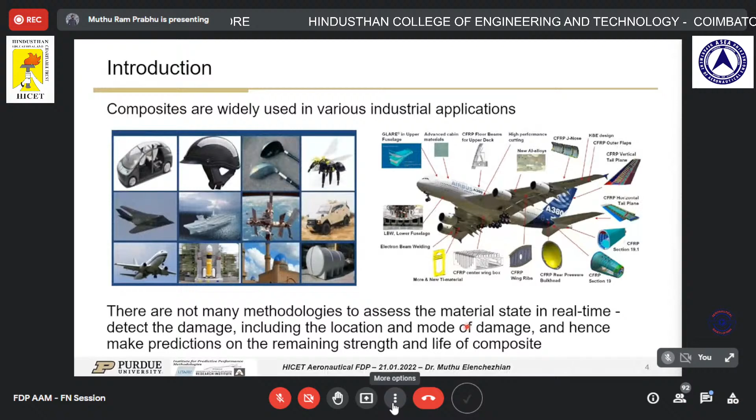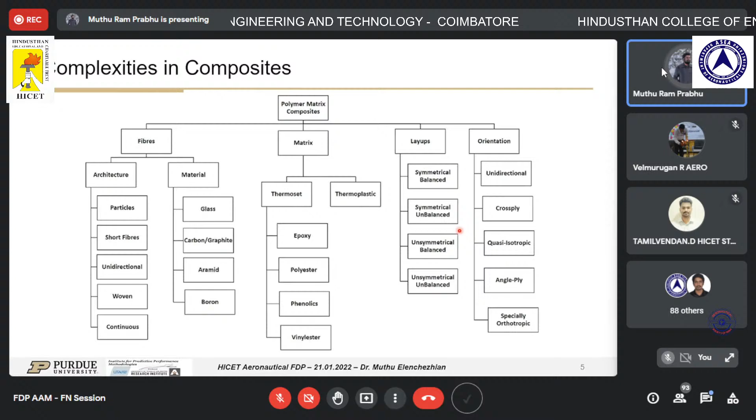So as we all know, composite materials have fibers and matrix, and can be made up of different layers like symmetrical or unsymmetrical laminates, and can have different orientations of fiber materials or prepregs or preforms. Changing each of these individual properties will affect the overall property of the composite material and change its entire behavior as well.

So for one such behavior, this is a typical damage mode which actually develops in composite materials. So the plot over here shows the percentage of life, and over here it shows how much damage the material has. So over the percentage of life of the structure, that is under fatigue loading conditions. By fatigue, I'm referring to cyclic loading conditions.

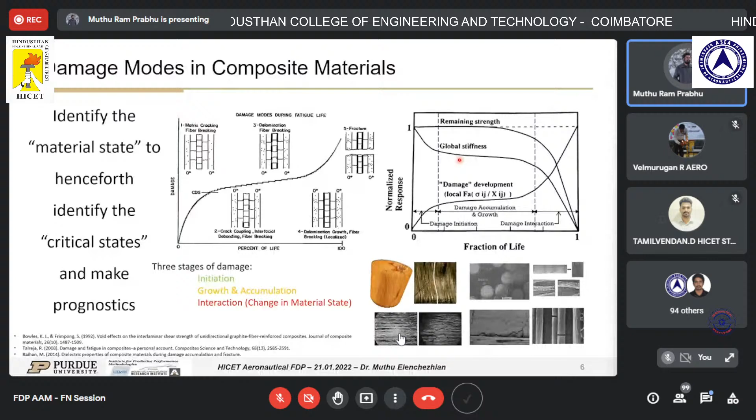First, in the initial stage, there's matrix cracking. So between the fiber and matrix, matrix cracking occurs first, and after that, over the duration of the life, the damage develops a lot, and the other 2 stages such as crack coupling and delamination will occur. And further, as it develops, the final fracture will occur at the final stage. And apart from only considering damage, we also consider stiffness, because the remaining strength as well as stiffness remain at high levels until it reaches the final stages.

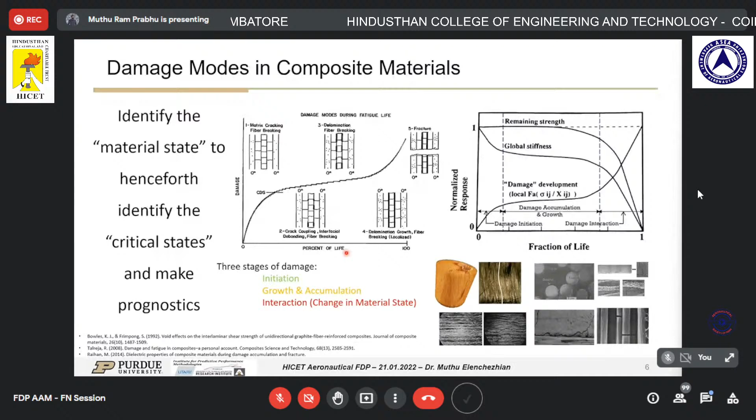So based on these 2 plots, we can actually categorize damage into 3 stages: initiation, growth and accumulation, which is the second stage, which is over here as 2, 3, 4 stages, and the final interaction stage where the fracture occurs or the complete failure occurs. So while identifying damage and testing, we need to identify all the 3 stages, and the methodologies need to be developed completely to identify all the 3 stages.

So I'll go to some review of literature. So overall, in the life cycle of composites, the first process starts with design, where we start with either classical lamination theory or material design. And after that, for manufacturing, it can be hand layup technique or vacuum resin infusion techniques, autoclave processes, out of autoclave processes. And right now the advancements are in automated fiber placement processes.

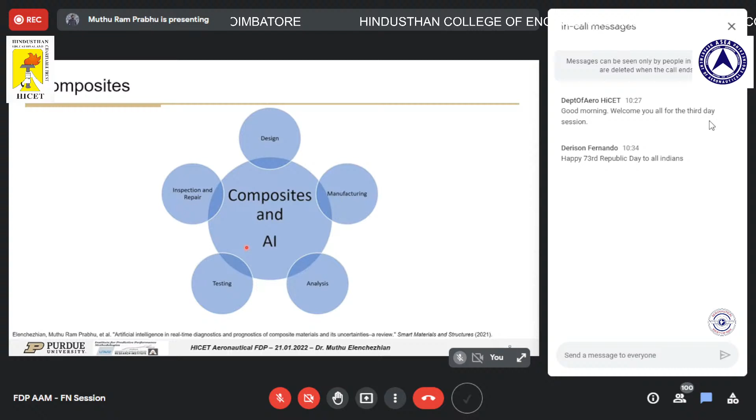And in analysis, it goes to CAE analysis and FEM analysis, where you do all the structural analysis in software. In the testing part, it's with sensor monitoring and non-destructive testing, where you do not damage the entire structure and do testing of the material. And in some cases, for the preliminary testing, you basically do mechanical testing or fatigue testing of the material, and based on testing you also do inspection and repair. So you analyze what kind of failure is in the material and further develop based upon it.

So in all these parts, artificial intelligence is right now being developed and involved to create the entire life cycle in a better way. So that is how it's focused. I also noticed there's another talk on design of composites in AI this afternoon, and so this particular talk will focus mainly on testing, analysis, and inspection and repair. So testing, inspection, and repair, mainly on structural health monitoring and how to use the sensor data to further predict the life of the composite material.

So moving forward, I will just go through the basic diagnostics and prognostics methods, like what are the sensor systems and how are they available. The most commonly used sensors which are embedded into aircraft structures are like this, and most commonly used are acousto-ultrasonics testing and fiber optic sensor systems. These two are most commonly used by most of the manufacturers. Acoustic emission is also being used, and each of these sensor types has different advantages and disadvantages.

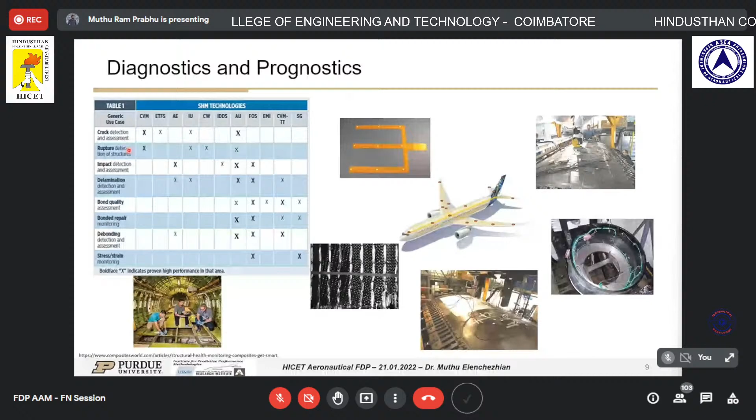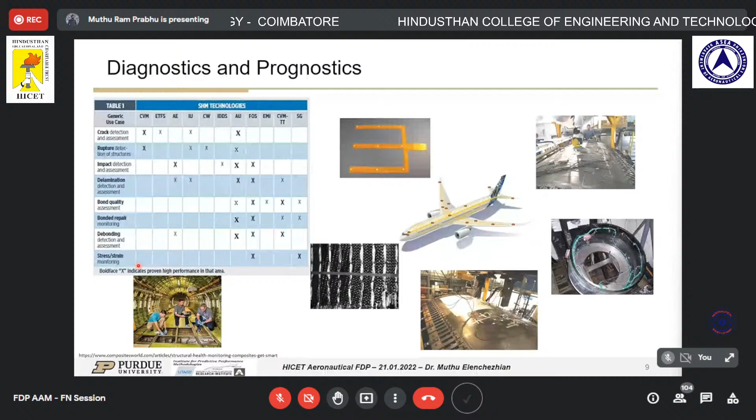That is, not one sensor can measure everything, and for each of these techniques you need manual, human intervention, where someone who has the complete knowledge of sensors and how to analyze the data has to be there to see what kind of results the sensor gives, and hence suggest what methods can be improved. And why do we need artificial intelligence to take part in this composites integration for diagnostics and prognostics?

But when there's a large amount of structure and assumptions which cannot be derived completely, you will have a large amount of data, and that's where data-based learning, machine learning, and artificial intelligence comes into play.

So the main method for my research work was, after we identify the damage and do some assessment based on non-destructive testing and structural health monitoring, we develop methods which can predict the residual strength and life of the material. Further, we use artificial intelligence techniques to take decision actions, like control actions, on how we can control the load, perform maintenance and repair operations in aircraft structures, and properly send the structure for maintenance.

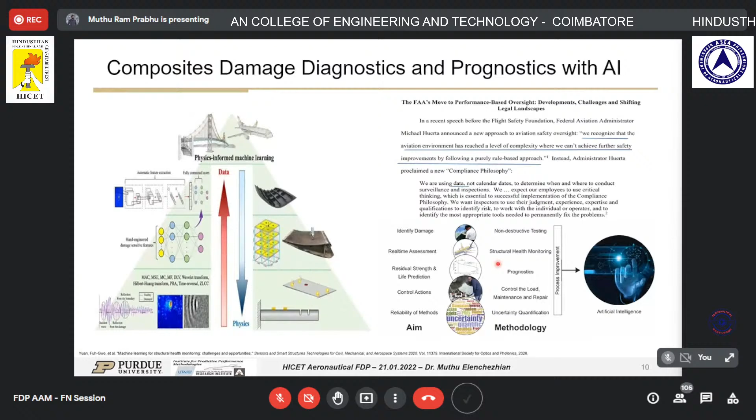If you see on the research side, academia side, or publication side, earlier from 1990s to 2015 or 2010, the number of articles published which combine composites, structural health monitoring, sensors, and artificial intelligence were very few. Only during the past 5 years has the number of publications, the amount of research work, increased a lot. Even funding has increased more for AI developments, due to the improvement in computer technology and the capabilities we have right now.

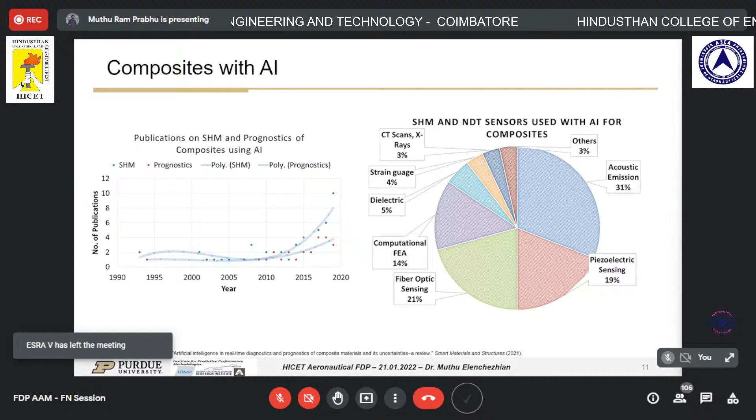So some previous work, how other researchers have used composite materials with artificial intelligence, includes...

Can you hear me properly? Yes, sir.

So with composites and AI, other researchers have done things like manufacturing and testing services. During mechanical testing, they collect data using acoustic emission sensors, and from the data they use vector of descriptors. For each sample they collect the data and analyze it. After that, sometimes we have a complete labeled dataset, meaning from the data collected by mechanical testing, we know what is happening behind it through the ground truth data. But in some cases, you do not have any ground truth data.

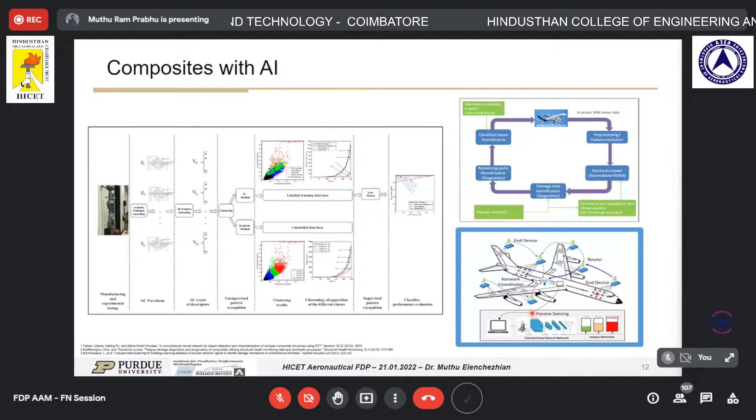This is another concept where researchers have proposed using completely integrated sensor systems, which collect data through additional wireless sensors that transmit to a control device, which communicates with the machine learning models. Based on the type of defect or impact, it will be able to say whether the condition is safe or damaged, or what service needs to be taken.

So for prognostics, even though more methods were developed on diagnostics, which is identifying what type of damage it is, there weren't many researchers who mainly worked on prognostics. That is, after identifying the type of damage, how to predict the entire remaining life of the material. This was an interesting topic which I began to work on.

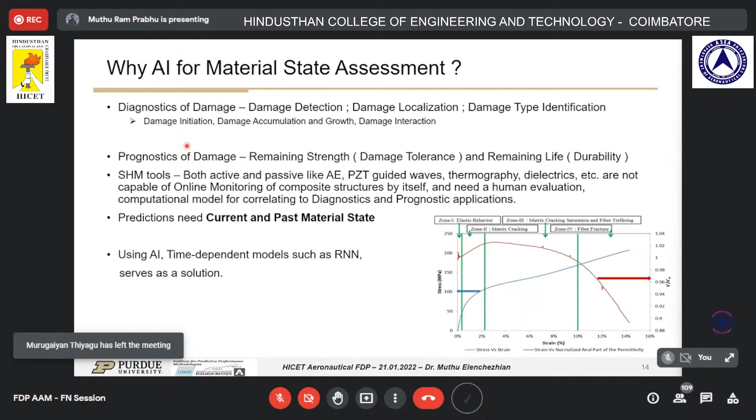So as a summary, why do we need artificial intelligence for material state assessment is, as I mentioned earlier, the damage types depend on damage initiation, damage accumulation, and damage interaction. However, all the SHM tools can collect data on the current state of the material, but always need some human evaluation or other computational model to actually predict the life or something.

So by using artificial intelligence with time-dependent models like recurrent neural networks, we would be able to use the current state of the material, what type of damage it currently has, and also observe the past behavior, how the material has been performing so far, if there's been any crack developed previously, and how that crack is currently influencing the current damage. This could be possible by using artificial intelligence methods completely.

So what is artificial intelligence? I'm not going to go deeply into the mathematical detail, but I'll try to provide an overall overview of the AI examples completely.

In traditional methods like classical lamination theory or any physics-based methods that we develop for FEM or anywhere, we have the theories and we have the input data that we need to provide into the model we are developing. Based on that, we develop the codes and model and we finally get the answers.

But in artificial intelligence, you actually have the answers, like the solution, and you have experimental data, and you do not know exactly what is happening between them. You do not know a complete relationship, and you want to establish one. So for that case, you use AI models to develop the relationship, and that relationship, once developed, just serves as theory.

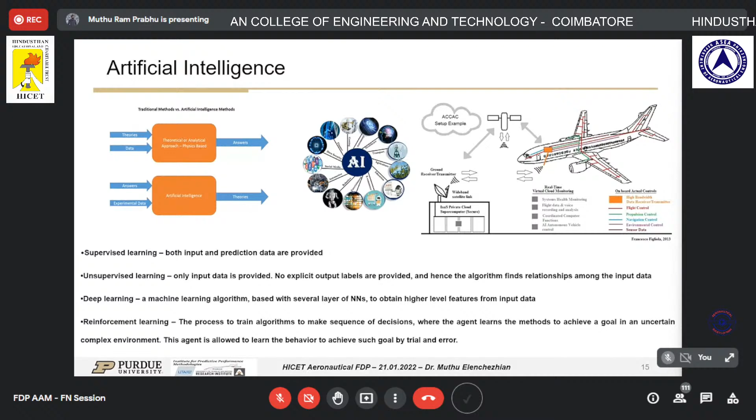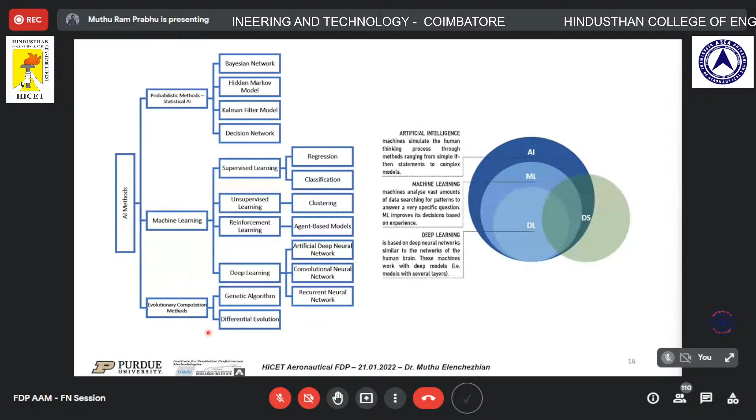Based on this, you can also develop different models, like statistical AI methods, normal machine learning, which I spoke about earlier, and also evolutionary computational methods like genetic algorithms and other things. My research and this presentation will mainly focus on machine learning, that is purely data-based algorithms completely.

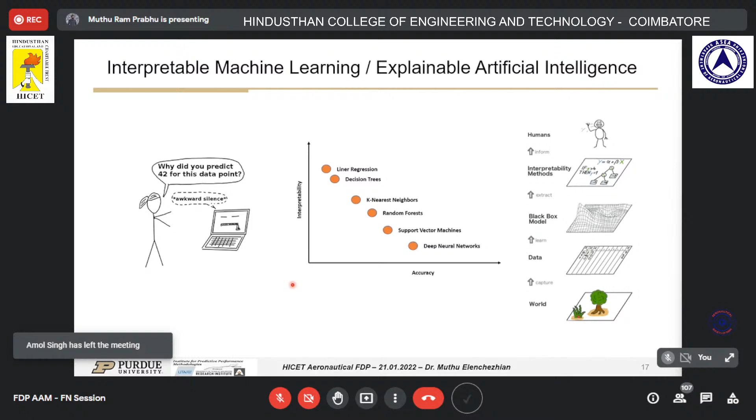Apart from the AI part, development has been done for the past 5 to 10 years. However, the current interest in the research field is about interpretable machine learning or explainable artificial intelligence.

Let's say you develop an AI model and it predicts a particular value, that this is going to be the life, or the strength of the material, or some other outcome for your own project or case. So why did your model predict that particular result? You need to be answerable on why that particular decision was made, or what kind of data made that decision.

That is one of the interests, and it's mainly important because most companies or industries right now develop AI models for space applications and critical domain applications, but for these you need certifications. Without certifications you cannot proceed further, and to achieve them you need to be 100% sure your model is completely accurate in predicting, or at least 99% sure, because it involves a lot of cost and lives as well.

This particular concept has recently been developing mainly for composite materials. I haven't seen more than 10 to 20 papers on this topic as of now, so this is an emerging research field as well.

In this presentation, the models I have used mostly are like linear regression, where you directly establish a relationship between input and output variable in a linear manner, and logistic regression. I have also used random forest, which is kind of like decision tree algorithms, where you can use it for either classification or regression.

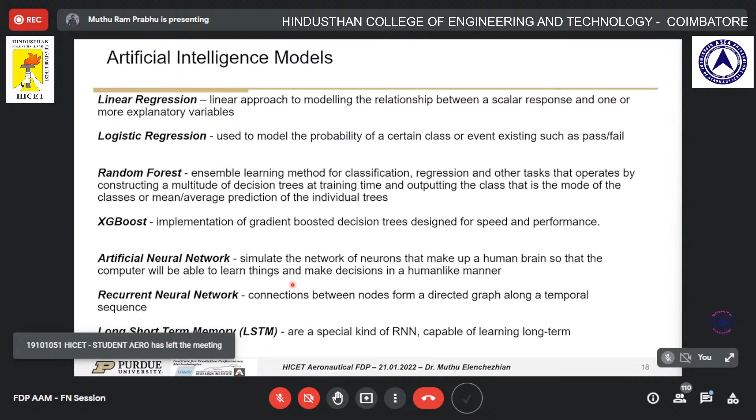For a neural network model, the simple example is input-to-output mapping. You have a number of inputs, and with these inputs, you need to map to a particular output. So you design a layer, or some in-between layers, and those layers assign some weights. The output is calculated based on how the weights are generated, which are randomly assigned in the beginning, and further developed to predict the output.

I'll explain this with a simple example, which many of you might have already seen if you've taken Professor Andrew Ng's machine learning course on Coursera. But for those who haven't, this basic example helps us understand the concept more clearly. This example is about the AND gate.

All of us have learned what an AND gate is and how it works. The AND gate has two inputs, x1 and x2, and the output y does the AND operation for x1 and x2. Now we are trying to generate this as a neural network model, or like a simple logistic regression model.

So over here we have the same x1 and x2, and we have a bias term which is 1. Now we need to assign some weights to it, and the weights are 20, 20, and minus 30. Once the weights are assigned, we need to calculate the output, and it is calculated by a function: g of minus 30, into the complete term over here.

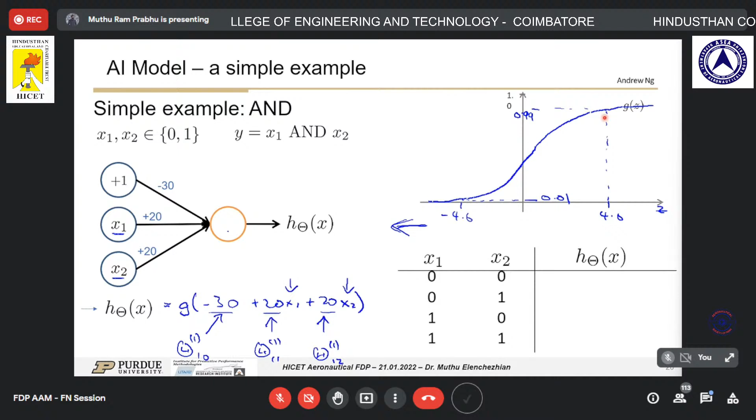So this is the function which has been calculated, and based on this you have an activation function. Over here we use a sigmoid activation function, and there are many other activation functions that can be used. So if g of this particular value is greater than 4.6, it corresponds to 1, and if it's lesser than negative 4.6, it corresponds to 0. Based on what this value develops, we would be able to produce the output for the AND gate.

So this is a very simple basic example of how a one-layer neural network model can be developed. Most artificial intelligence is developed based on these principles but becomes much more complex depending on how many layers you use, what kind of optimization algorithms we develop and use, and how we actually generate the entire models. It mainly depends on what data you have and how your data development is.

So the basic steps for these artificial intelligence models are: first we pre-process the data, that is data cleaning and normalization. Sometimes you have uneven data, like the total length might be non-uniform, so in those cases we do data padding, that is we make the data uniform length.

After that, the total data set will be divided into two different sets: training set and testing set. In most cases, 80% of the data is used for training and the remaining 20% is used for testing.

And with the training set, you can actually do a cross validation test, that is, this 80% of the data goes into cross validation, where you can do a 5-fold or a 10-fold cross validation. During each development process, the number of training and cross validation tests changes, and based on this, multiple developments are done so you can do hyperparameter tuning. So this is how a basic AI model is developed.

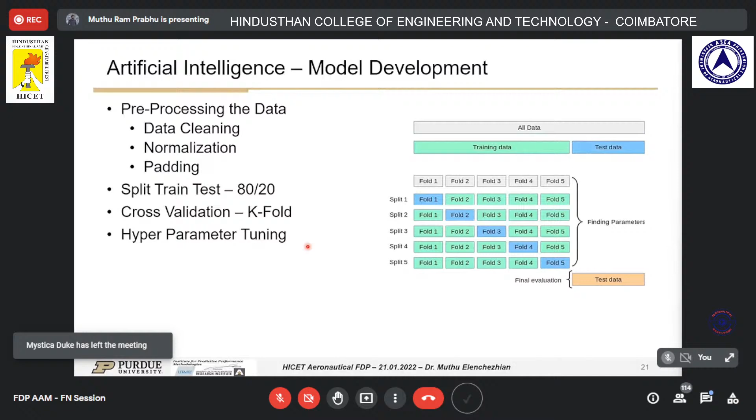Now moving forward, I'll talk about the main focus of my earlier work. I want to implement a complete real-time prognostic system where you place sensors in the aircraft structures and develop a cloud-based monitoring system where, by the aircraft's tail number, you can observe what kind of sensor data the aircraft collects.

And based on the cloud, you can see its material properties, manufacturing data, how it was manufactured, how many times it was serviced, and what the previous material condition was. By the real-time sensor, you collect what the current material state is, and based on that, the AI model will predict the structural airworthiness of the aircraft.

That is, whether the aircraft is very safe to fly, or when it needs to go to maintenance, or what needs to be done next for the aircraft—after how many days, months, or years it needs to go for maintenance—so that it can be scheduled accurately and proper maintenance can be taken care of.

So next I will go with the sensor technologies which I worked with. I'll be introducing a concept called broadband dielectric spectroscopy. In most places, this is called electrical impedance spectroscopy. The way electrical impedance spectroscopy works is by the interaction of electromagnetic waves with matter, which reflects the underlying molecular mechanisms.

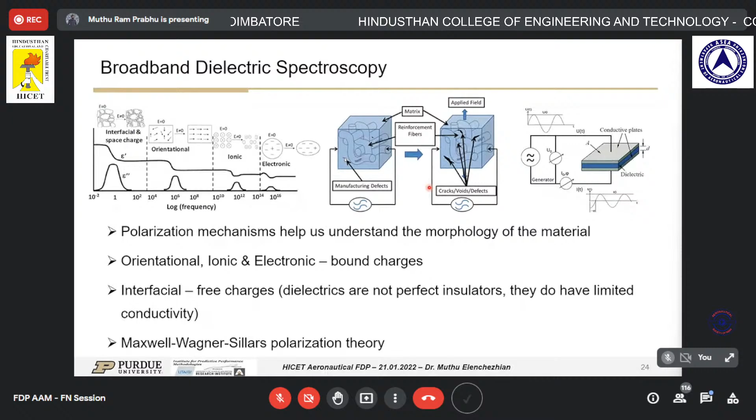So based on how the property changes between the initial state and later state, the difference between them is obtained. The relationship between the final state of the structure versus the initial state of the structure is what gets correlated to other patterns. This technique is not very popular, but it's been developing. My research group at UT Arlington, where I worked earlier, has been developing this a lot, and based on this, we did a lot of work.

So the blue curve over here represents a normal stress-strain curve, obtained by the MTS mechanical testing machine. And the red curve represents the normalized permittivity values, that is, the permittivity value with reference to the initial value. Comparing these two curves, we could correlate them into four different stages based on how the rate of the red curve develops, and this is correlated to zone 1, zone 2, and what kind of damage mechanisms happen.

And this test was done for about 50 samples. On most of the 50 samples, what was observed was that if the mechanical property, that is the strength of the material, was higher, then the dielectric property observed was lower. This is compared to the average values of the mechanical properties and dielectric properties.

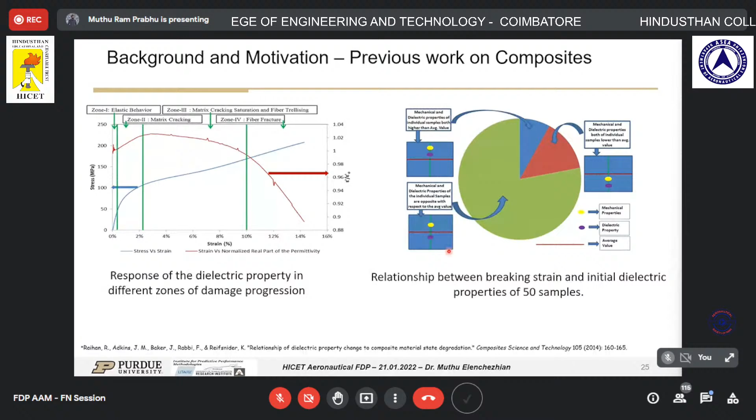Further, we also do adhesive bonding, where you bond composite structures or even metallic structures. Most aircraft structures, like helicopter rotor blades, do not use fasteners or other joints, and mostly use adhesive bonding because of the stress concentration factor. However, the weak point of adhesive bonding is that it can have a kissing bond or weak bond, and they need proper methods to analyze them.

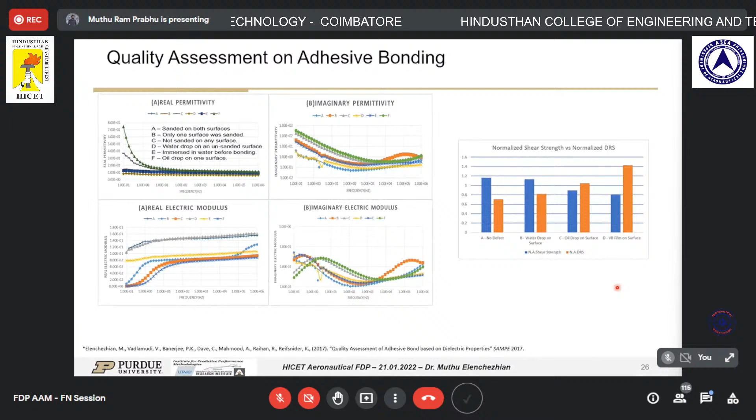So we use this broadband dielectric spectroscopy to make different types of defective samples and compare them. Based on the comparison, if the shear strength of the adhesive bond increases, what was observed was that the dielectric property was decreasing. So this was one of the methodologies that I used for most of my research work and for my PhD dissertation as well. And the other sensor technology that I used commonly was the fiber optic sensing system.

The fiber optic sensing system is similar to our optical fiber internet cables, and most fiber optic sensing systems work by the principle called fiber Bragg gratings. Basically, in the initial stage, you have a particular Bragg grating, and when the fiber is elongated, that is when any thermal or mechanical load is applied, the fiber stretches and the Bragg grating moves. Based on how much it moves, you can calculate the temperature difference or strain difference the material is undergoing.

And this has been a very popular application currently used in aircraft and space research, as well as for civil and industrial applications. Over here you can see a bridge which has been built in one of the rural villages here in the USA, in Tennessee. This bridge is completely made of composite material, and it also has fiber optics implemented into it as a monitoring system. It monitors how much load the bridge experiences during the entire time.

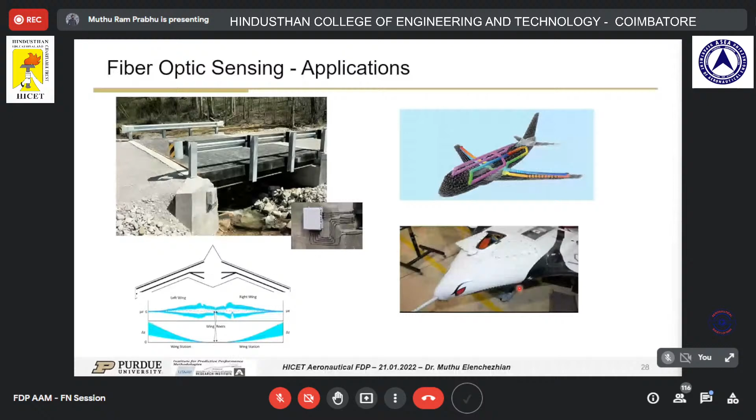Also, it can be used to track whenever a vehicle crosses the bridge. So based on whenever the vehicle crosses the bridge, that's a load which has been observed on the bridge. And in future, this can be implemented into complete aircraft structures by placing fiber optic sensors. As a demo concept, most UAVs right now have started using fiber optics to see what the strain deflection is during the actual flight, during takeoff and landings and such.

Another advantage of using fiber optic sensors is that the optical fiber sensors can be placed during manufacturing. That is, during layup, you can actually place the optical fibers into the entire composite structure itself. And the strength of the composite hasn't been found to vary a lot based on this. After this, during curing, you can also monitor based on temperature and flow how good the composite curing is. And in operation, you will be continuously monitoring the real-time health and strength.

So this is all the basic introduction, and I will move forward with my actual research work. This will show the actual examples which I performed based on the studies I have done.

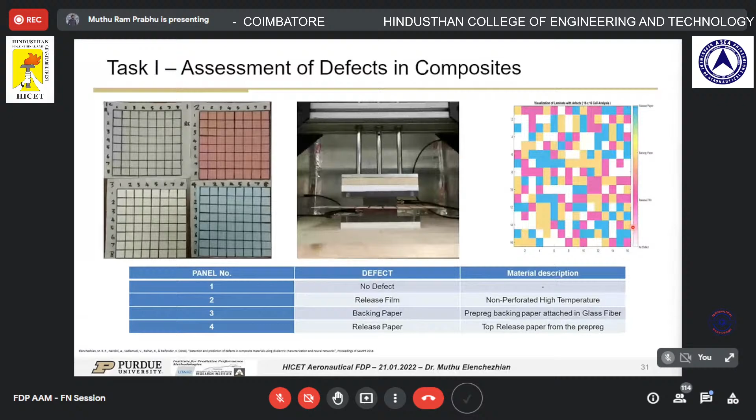So the first research task was performed to assess the defects in composite materials. I made 4 different composite panels and artificially induced defects in them, using a release film, backing paper, and release paper. Based on this, we did broadband dielectric spectroscopy measurements. If you imagine what the actual manufactured panels look like, they will look like these different images with different defects in them.

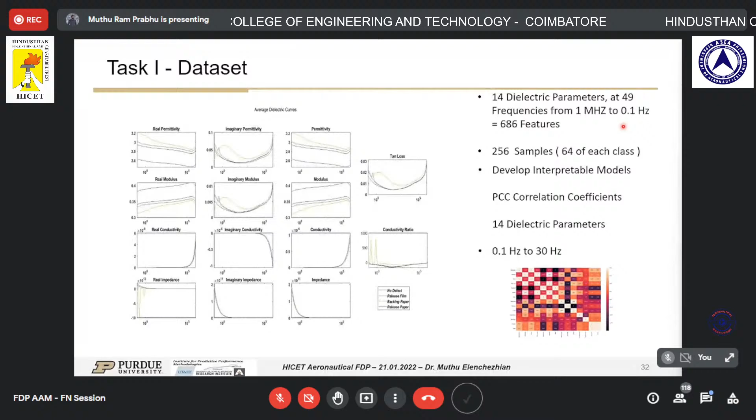Based on this, we collected a complete data set of a total of 256 samples. We had 4 different classes, so 64 data points for each class, and all of them have 14 dielectric properties. These 14 dielectric properties were collected at different frequencies from 0.1 hertz to 1 megahertz, that is, across the entire dielectric spectrum. After that, we did a Pearson correlation analysis to analyze the correlation between dielectric parameters, and it was reduced down. Only the limited data set was used for the complete analysis.

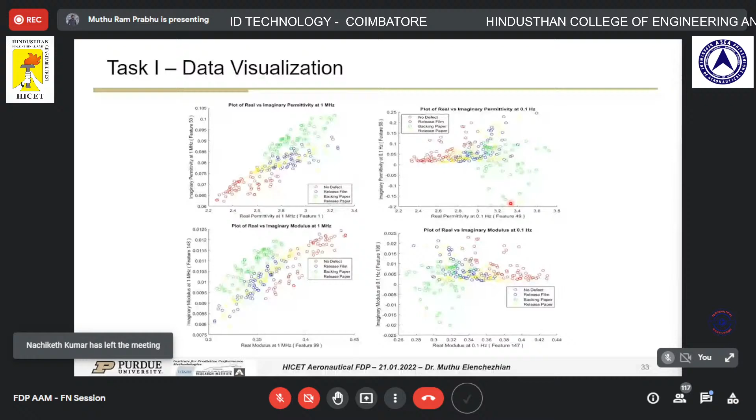The first thing we always do with data is visualize it to see if we can physically see any relationship. For the different features in the entire data set, we differentiated them into different classes. Over here you can identify a few of the defects, like which class each belongs to based on the data. Further, if you develop a machine learning or AI model, you'll be able to accurately define it, because visually you can just see 2 different features, but here you had almost 47 or 48 different features which I used in the final model.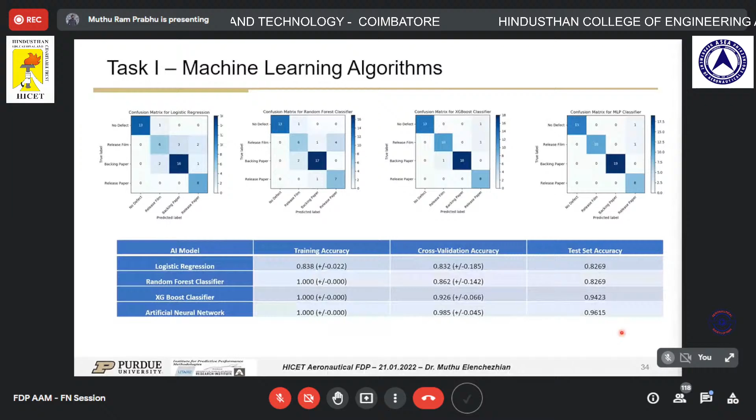We developed 4 different models, like a logistic regression model, because it's a classifier algorithm. After that, we used a random forest classifier and an artificial neural network model as well. These are the confusion matrices. A confusion matrix shows the true label versus the predicted label, that is, the ground truth data versus the predicted data from your artificial intelligence model. All 4 models had good tested accuracy, and the artificial neural network model had the highest accuracy.

For interpretable machine learning, researchers have also developed a concept called LIME, and based on this, you can obtain similar results. You'll be able to predict which particular feature contributes how much to each class of prediction.

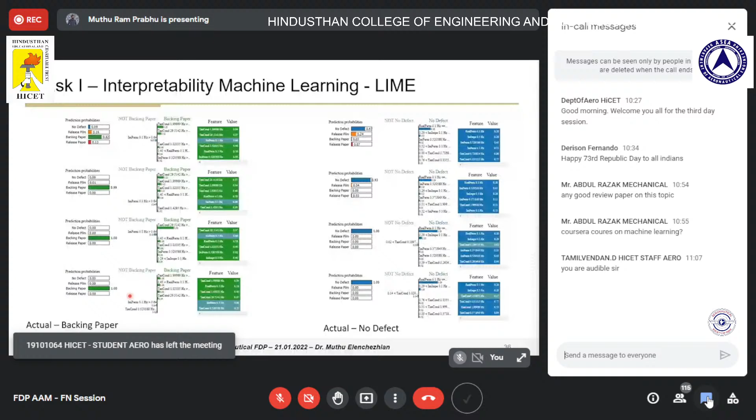So for all 4 models being developed, it was identified that the conductivity values over here at the low frequencies were contributing to the final prediction. So based upon different algorithms or different techniques that you use, your predictions will completely vary. So the main goal of developing the AI model is validating it. You need to be sure which algorithm gives you the most accurate and reasonable results.

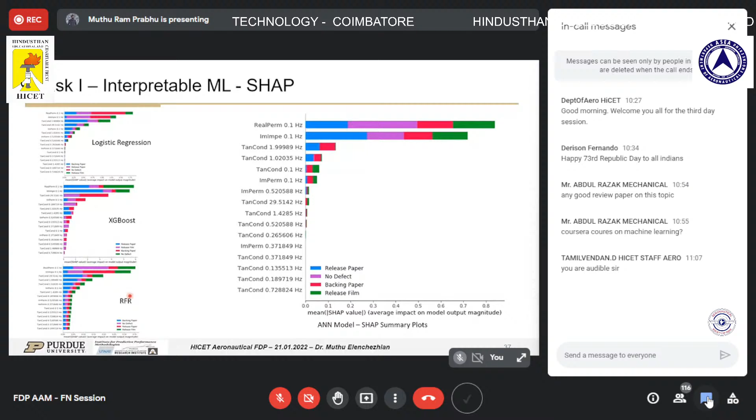And another technique for interpretable machine learning is SHAP. It does the same thing, but by another method. And in SHAP, you can actually do the global prediction, that is, identify which features contribute to the entire model's prediction as a SHAP summary, as well as you can do local prediction.

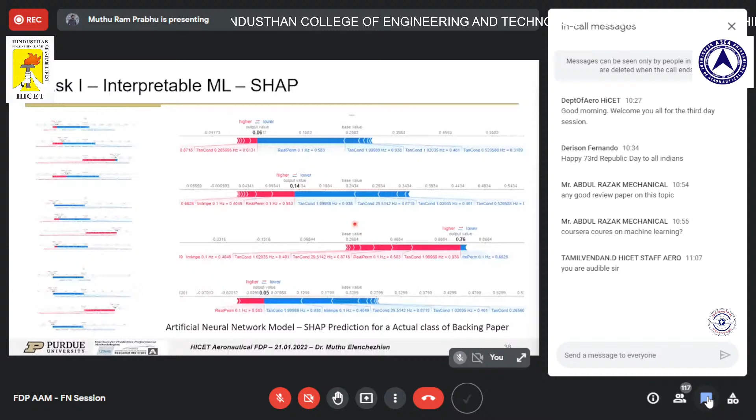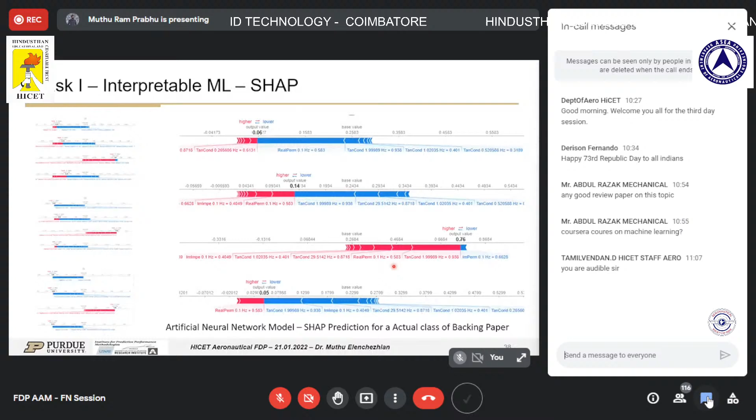So let's say the model predicted that your defect is going to be the third class over here, that is the backing paper class. Then you can say for this backing paper class, which has the highest value over here, as in all the other three models as well, which particular values contributed to it most. Here you can see it's the real permittivity at 0.1 hertz and the conductivity value at 2 hertz. And one thing you notice is different models give different results. So it's more important to validate it at a further stage.

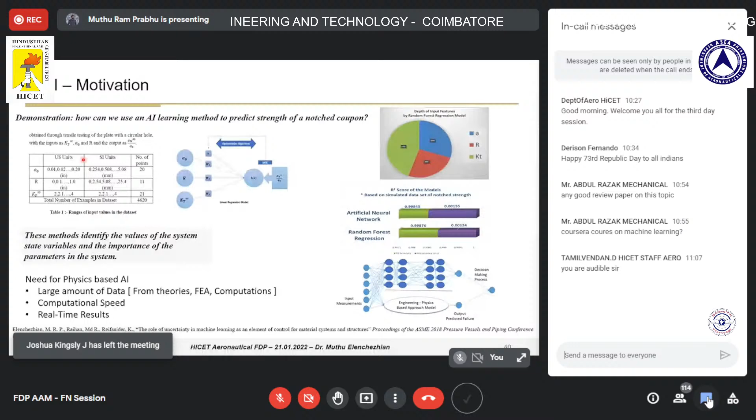The next task I'll be speaking about is how to identify the damage state. So how we started this work was, we first took a physics-based equation similar to the AND gate example. We took the relationship to obtain the notch strength of the composite material, sigma n divided by sigma naught. And the notch strength of the composite material is based on three input factors, which are KT, A naught, and R. So based on these three values, we have a physical relationship which has been established, and we generated an artificial data set with random input values for all three parameters, obtained from statistics and the literature.

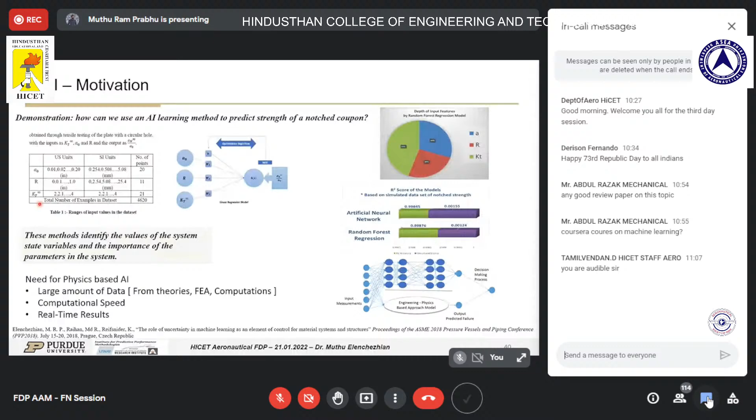And since this data set is developed from a physics-based equation, the R-square scores of the models are very high. It's more than 99.8% in both cases. And with the random forest regression, you can also identify what features contributed to the output prediction of the model.

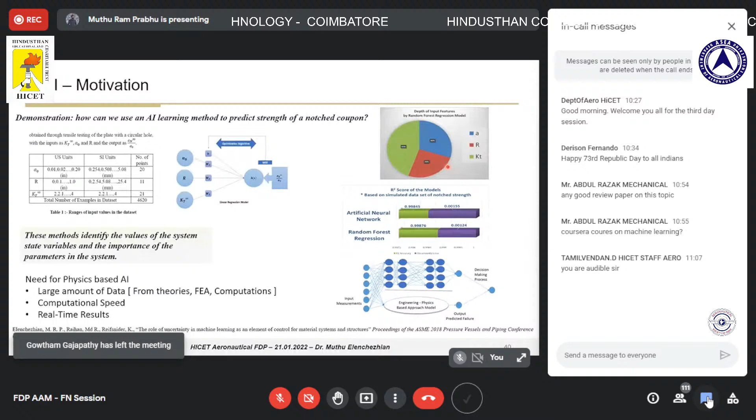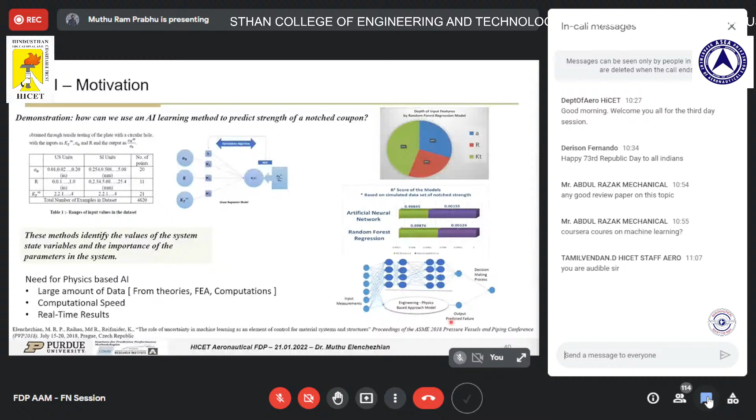And the main goal of this work is that apart from just using the experimental data that we are developing to build the output model, if we use some known physics in between, when there's a large amount of data involved, you will be able to develop a complete hybrid model. And this hybrid model will be able to produce results more accurately and lead to the final decision-making process.

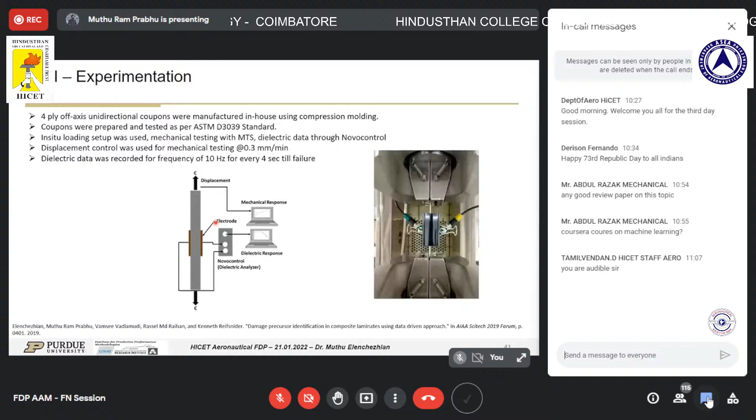And on the experimental side, what I performed was quasi-static testing of 4-ply off-axis composites. These were tested as per the ASTM standard in MTS. And during this, we collected the dielectric data during the quasi-static testing. Based on that, this is the fractured sample. And this is the stress-strain curve as we showed earlier, and this is the dielectric relationship curve.

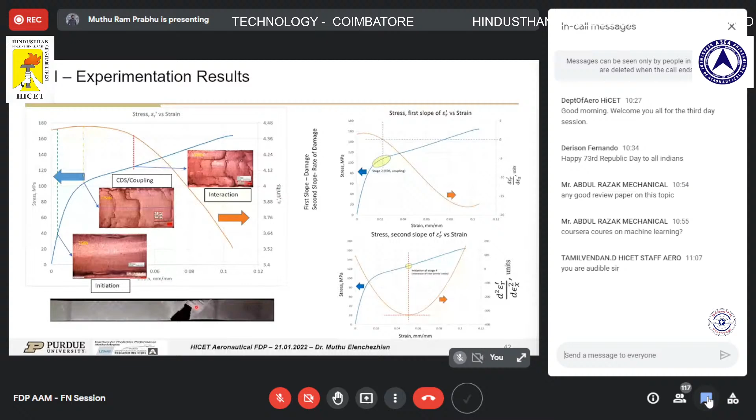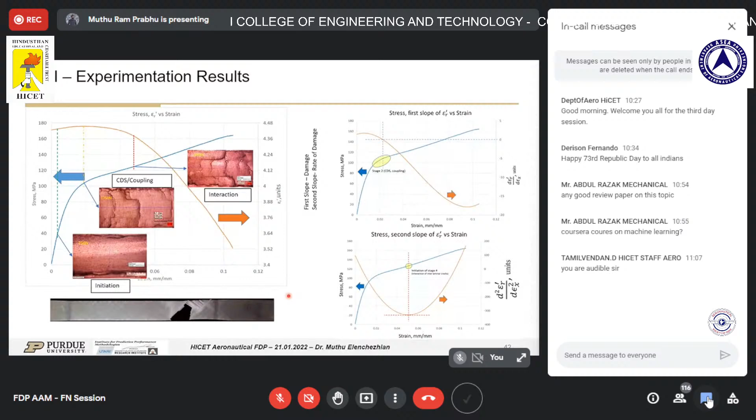So we obtained the first slope, which is the rate of change of these curves, and the second slope, which is the acceleration of the curves. Remember, this is for this off-axis sample over here. So for this particular sample type, we can identify the characteristic damage state point, where the actual stage 2 occurs. And from the second slope curve, the acceleration curve, we can identify where the damage actually accelerates. So this is based on quasi-static testing, and we collected a complete data set.

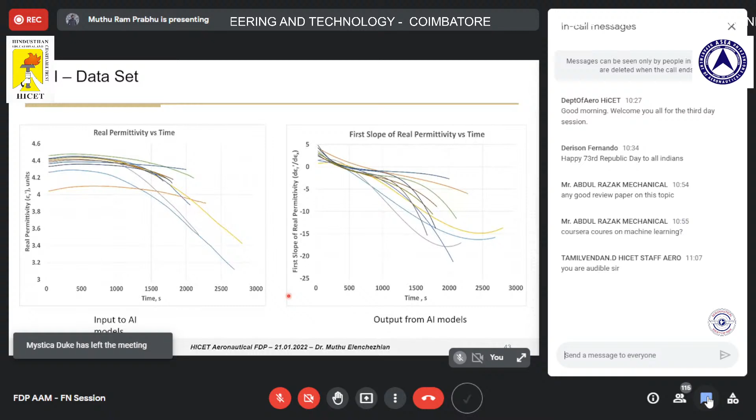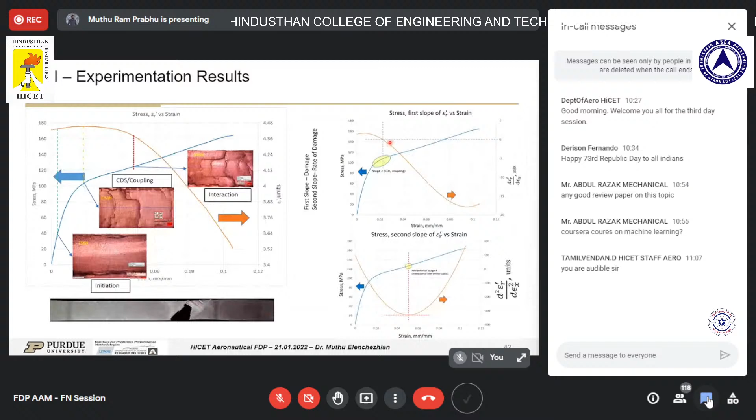And this data set is for 11 different samples. The sample set is still small. We collected the dielectric value versus time, and obtained the first slope of the values versus time for this curve. And we wanted to predict, given the real permittivity values, what the first slope value is. Because the point at which the first slope value crosses 0, where it changes from positive to negative, is identified as the characteristic damage state point, where stage 1 changes to stage 2.

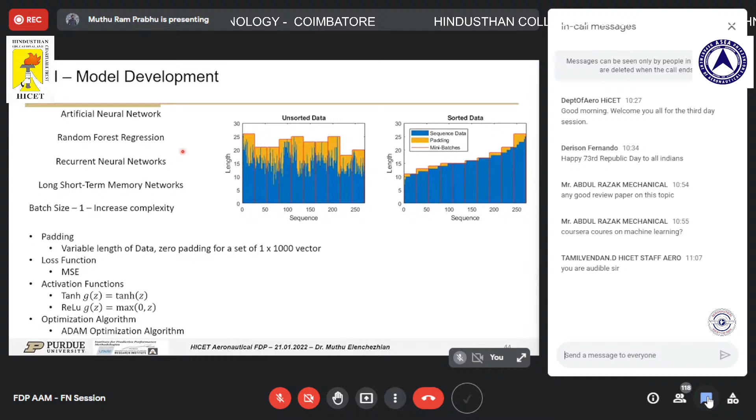So since the data set is of non-uniform length, we need to actually do padding to make the data uniform. And after we make the data uniform, we can classify them into different batches. And based on that, we developed an artificial neural network model, as well as a random forest regression model and recurrent neural network model. And these are the properties for the model that I used.

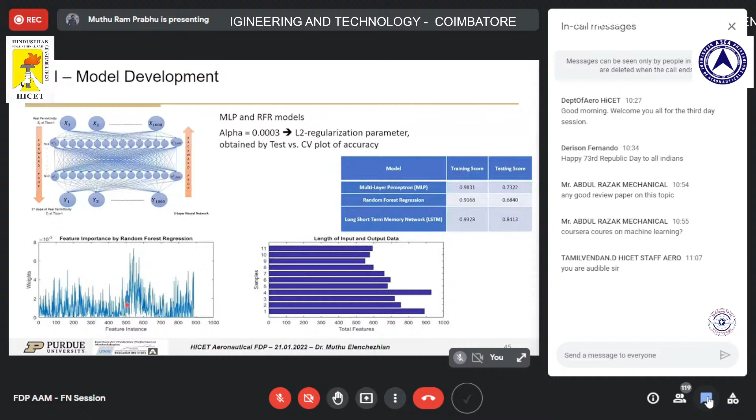So seeing the results, the long short-term memory network, which is the recurrent neural network model, had the best prediction accuracy. And this is the output from the random forest regression. In random forest regression, we'll be able to obtain feature importance, where we can see which features, at which point, most of the accuracy was predicted.

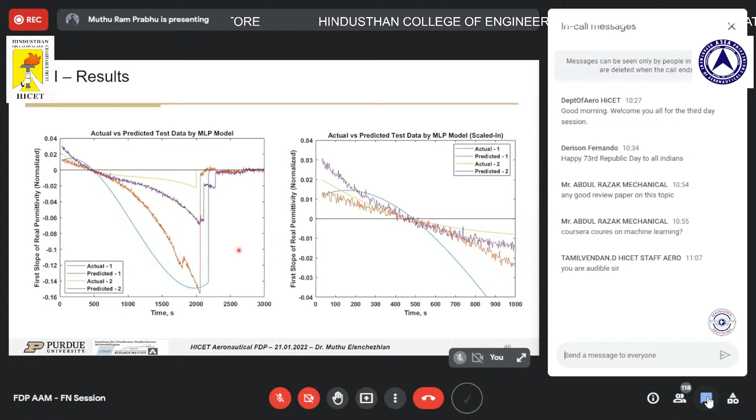And this is the results for the machine learning neural network model. Here we can identify that the prediction was close at the point where the actual characteristic damage state occurs, but the overall trend varied a lot. However, in the recurrent neural network, which is the LSTM model, the prediction was more accurate, and the overall trend matched a little bit better compared to the normal neural network model.

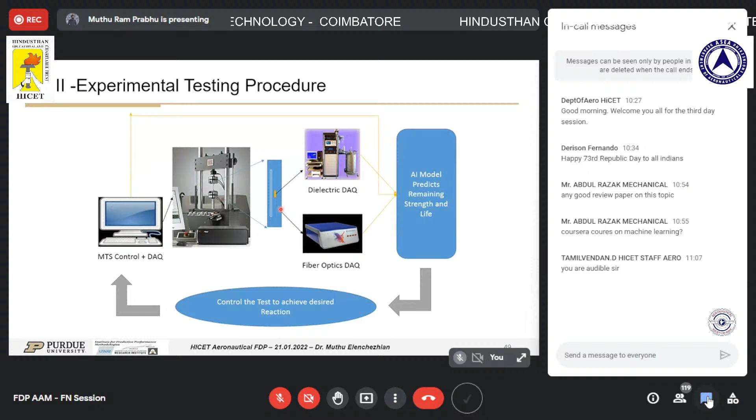And the final task which I performed was to do it under fatigue load, that is under cyclic loading conditions. So in this case, we did mechanical testing under fatigue loading conditions for the samples. And in this, we collected the dielectric data, and simultaneously we also collected the fiber optic strain data and developed the AI model, which can predict the strength and life of the material.

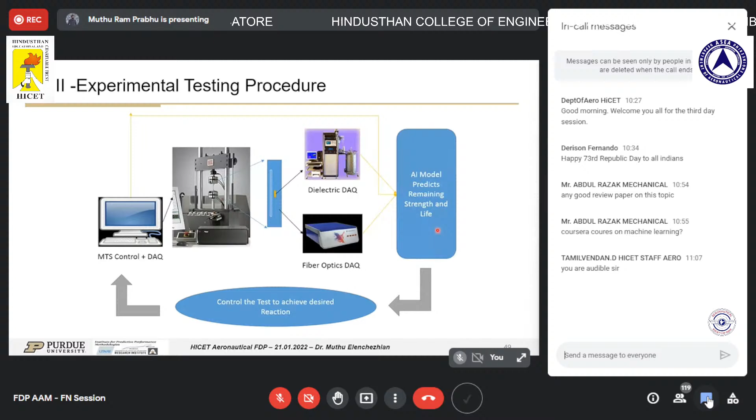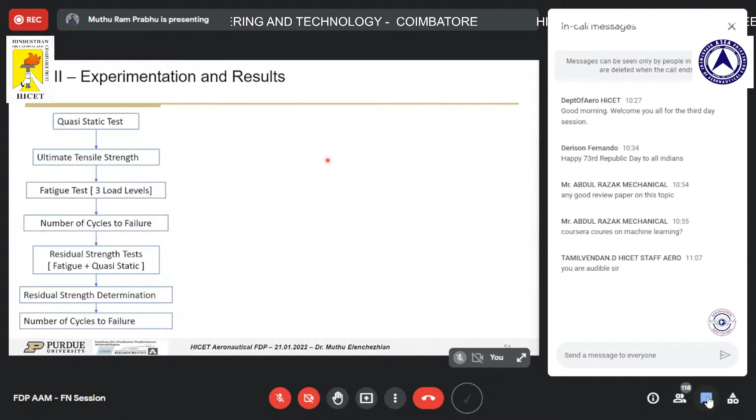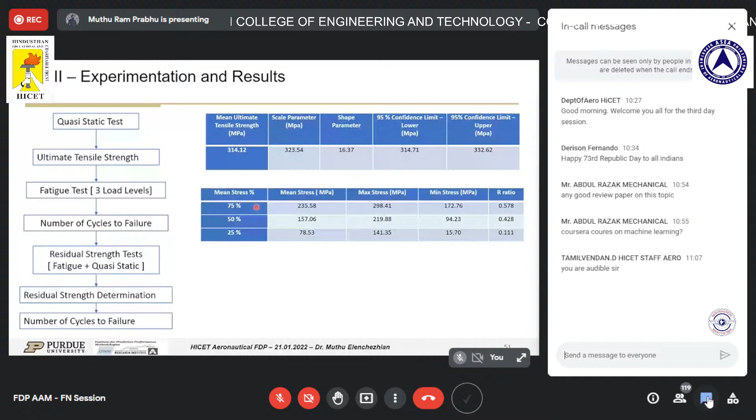So the first thing we performed was the quasi-static test, and from the quasi-static test, that is under normal static loading conditions, we obtained the ultimate tensile strength. The ultimate tensile strength was obtained to be 314 megapascal, and we did some statistical analysis on what the maximum and minimum value can go to, and based on that, we determined to do fatigue tests at 3 different load levels. That is at 50%, 25% and 75% of the load cycle with different R ratio values.

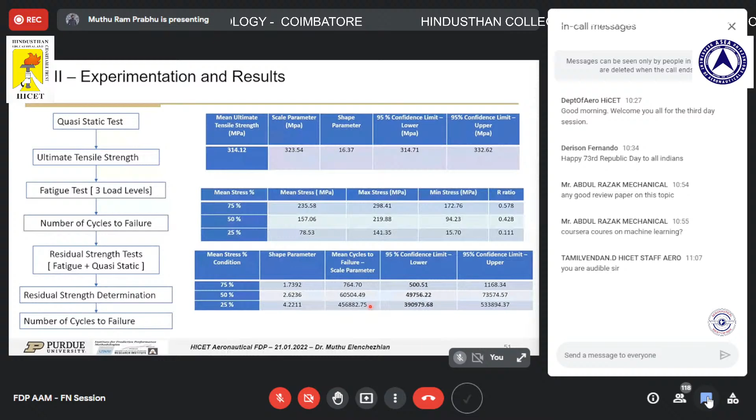And for each condition, first we ran a complete test where we collected the number of cycles to failure for each of these different load conditions. So these are the mean cycles to failure for the 3 different load conditions, and under fatigue, composites will have different values. One sample will fail at 10 cycles and another sample will fail at 500 cycles. That's a common property of composites. So you always need to do a lot of samples to get more data.

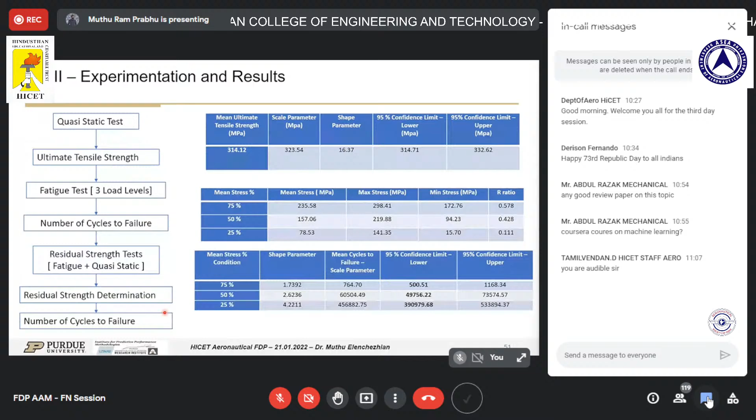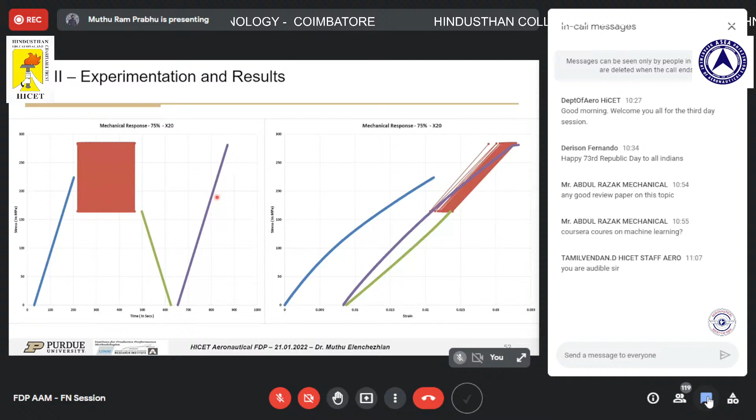And after that, I did some more tests to identify the residual strength, that is the remaining strength of the material. So this is a typical pattern that we did for the fatigue test, where we load up to a certain level, do fatigue for a limited number of cycles and then ramp it down. And after the cycles have been done, we pull it up till failure to know the actual remaining load of the material.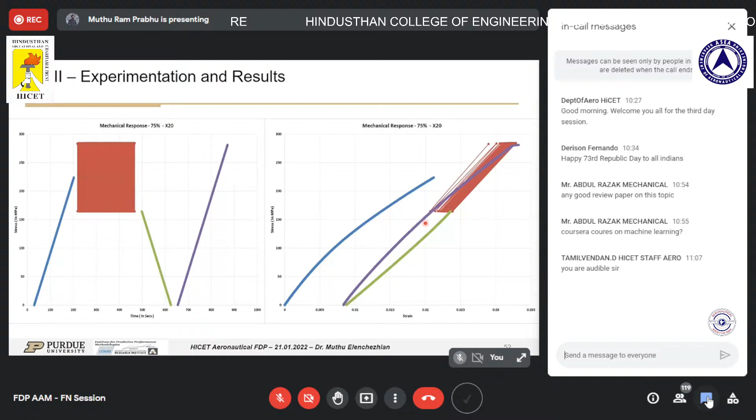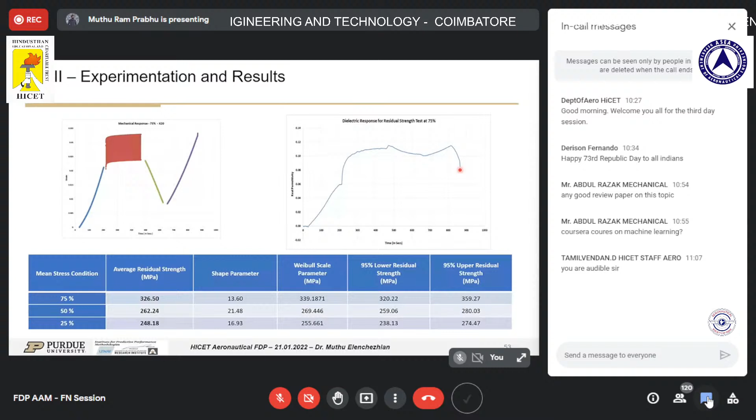And this was the mechanical response which was applied based on strain. So these are the strain values. And this strain value is compared to the dielectric response value over here. So this is the data that we got from the dielectric. This is during ramp up. This is during the fatigue curve. This is during the unloading curve. And this is during the second ramp up and during failure. And different residual strength values were obtained for the 3 different loading conditions.

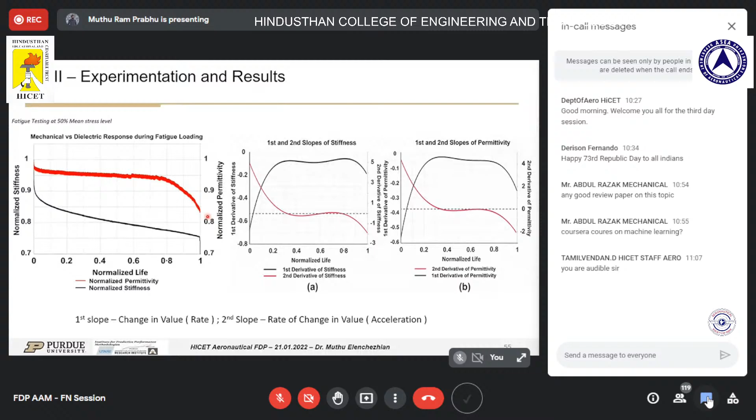So how I use this data is that we first obtain the first slope and second slope values. So we have the stiffness curve over here, which is normalized, which is the black curve. And we also have the dielectric property curve, which is the permittivity curve, shown in red. So you can see almost at 80% of life, or after 75% of life, the permittivity curve shows a reduced behavior over here. But the stiffness curve is still straight, as you can observe directly.

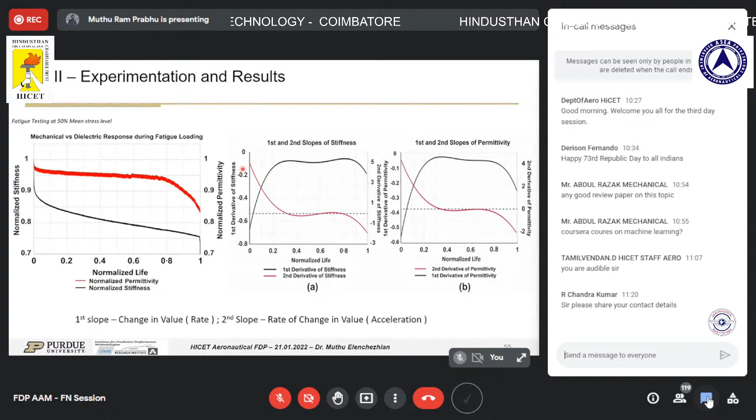So by obtaining the first and second slopes for stiffness, you can see the black curve is the first derivative, first slope, and the red curve is the second derivative. And similar curves were obtained for permittivity as well. The red curve is the second derivative and the black curve is the first derivative. Comparing both in the same figure and normalizing the values, the red curve shows the stiffness curve and the black curve shows the permittivity curve.

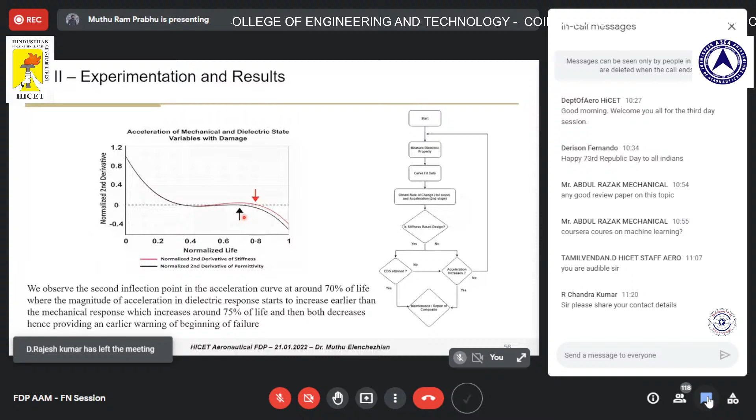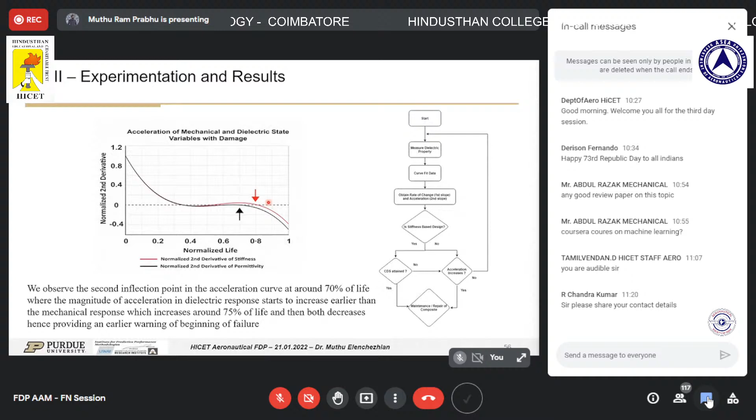That is, the permittivity curve was able to predict the failure in the material well earlier than the final failure actually occurred. The failure in the stiffness curve was obtained at 75% of life, but the permittivity data was able to predict it at almost 70% of life. And this is for one particular loading condition of fatigue. The same behavior was obtained for the other two loading conditions of fatigue as well, under 25% and 75% mean stress levels.

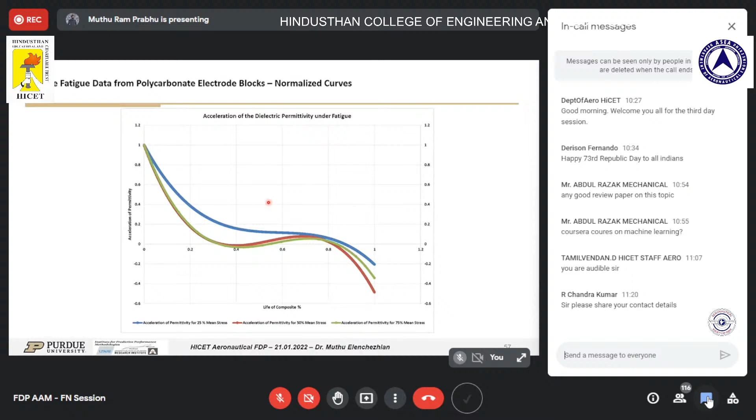So based on this, I used this input data, where we have the actual permittivity over life and also the strain over life, to develop AI models. The AI models I developed predict the output given different time steps of data. That is, you need to make real-time predictions. You won't have the entire data set to make the complete predictions. So first, you give only the first 100 time steps of data and leave all the other data to be 0 or a padded value of 1, and you see what the predicted output life is.

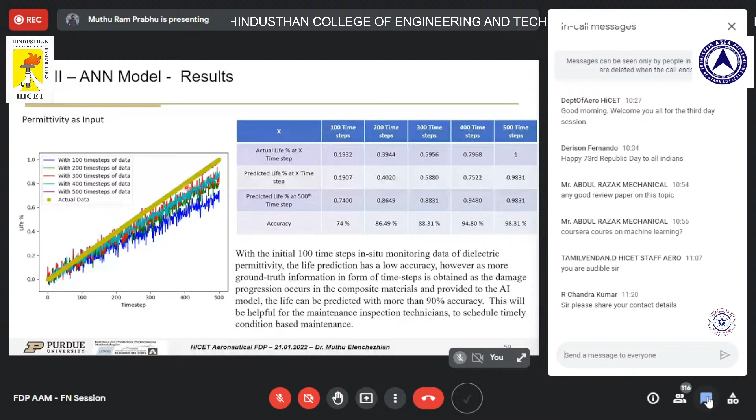And as you get more information about the material's health, you provide more data to the model. As you slowly provide more and more data, your prediction accuracy increases, because as we saw from the damage behavior, you do not know the complete damage state or damage behavior in the beginning itself. You will mostly know accurately when it's about to end, at almost 75 to 80% of your life. And that's a typical behavior of composite materials. So this is what we observed when we used permittivity as the input.

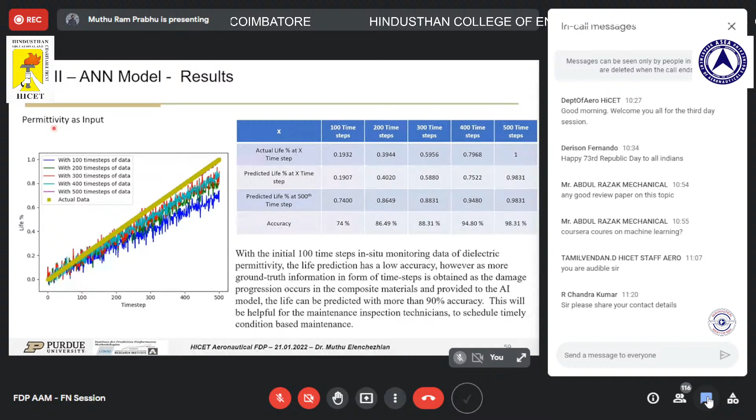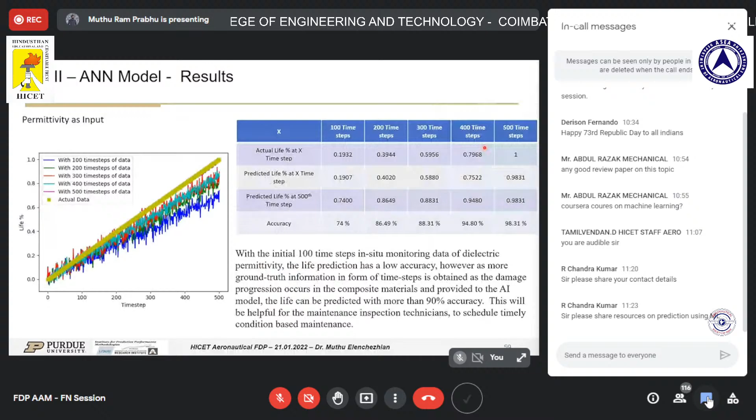But this was not the case with strain, because the strain data was very close for all the different time steps, even with more data. So with the strain data, we were able to get closer predictions because the strain data had uniform behavior, but the dielectric data did not have a uniform behavior in the overall response.

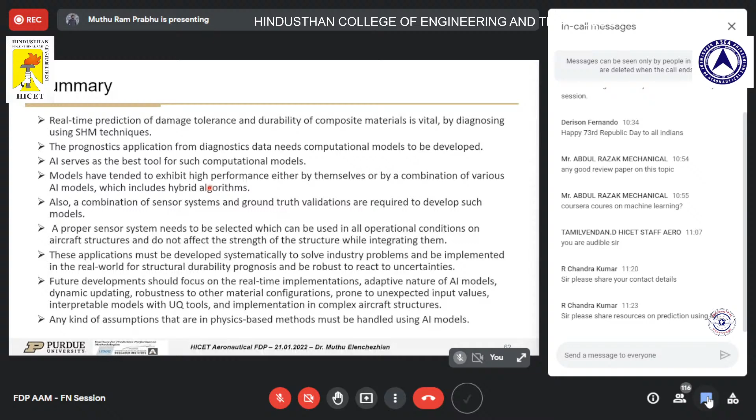So this is the complete research work that I have done so far using the sensors for prognostics. That is, we need to use prognostic techniques so that we can predict the remaining residual strength and life, and use artificial intelligence algorithms. These algorithms need to be developed so they are adaptive, usable for any different composite material, robust to other material configurations, and have some kind of physics implemented in them. They also need to account for uncertainty, that is, how interpretable the model being developed is.